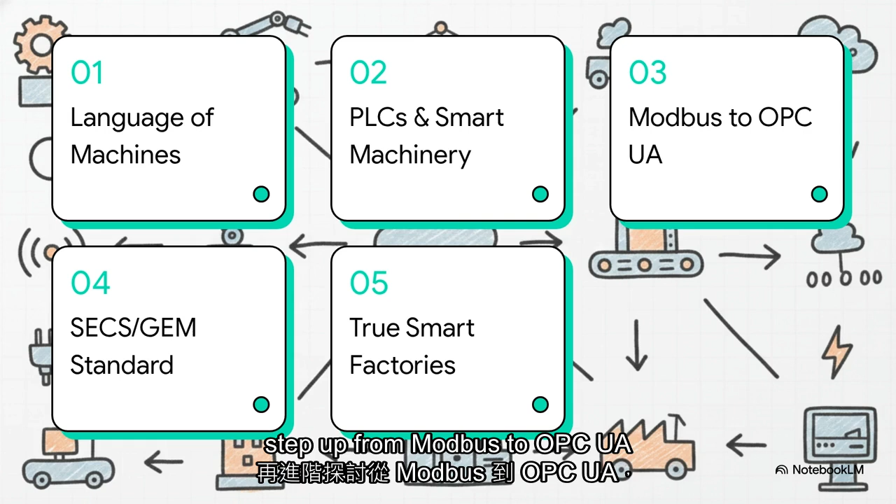Here is our roadmap for today. We'll start with the language of machines, move on to PLCs and smart machinery, step up from Modbus to OPC UA, explore the SECS/GEM standard, and finally, look at building true smart factories.

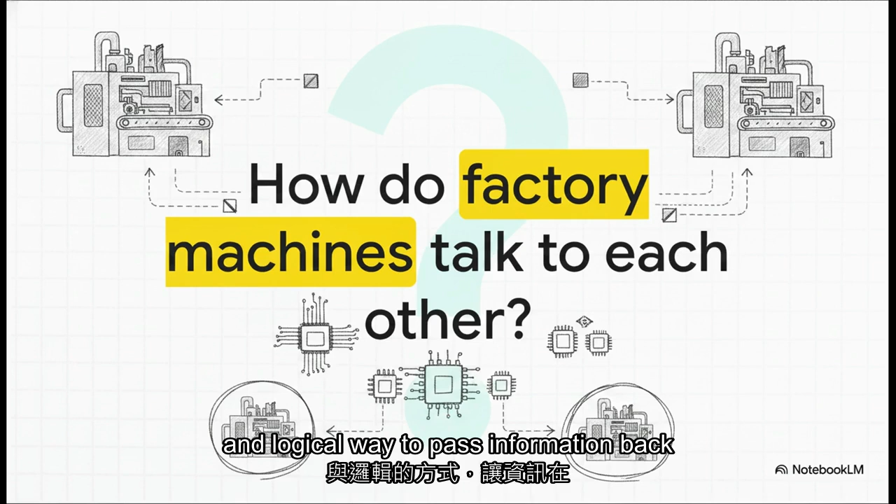All right, Section 1, the language of machines. So I want to pose this question directly to you. How do factory machines actually talk to each other? We toss around buzzwords like big data and system integration all the time, but before we can pull a single drop of data into some shiny dashboard, we need a physical and logical way to pass information back and forth between chunks of metal and silicon. Without a shared language, you just have isolated islands of machinery.

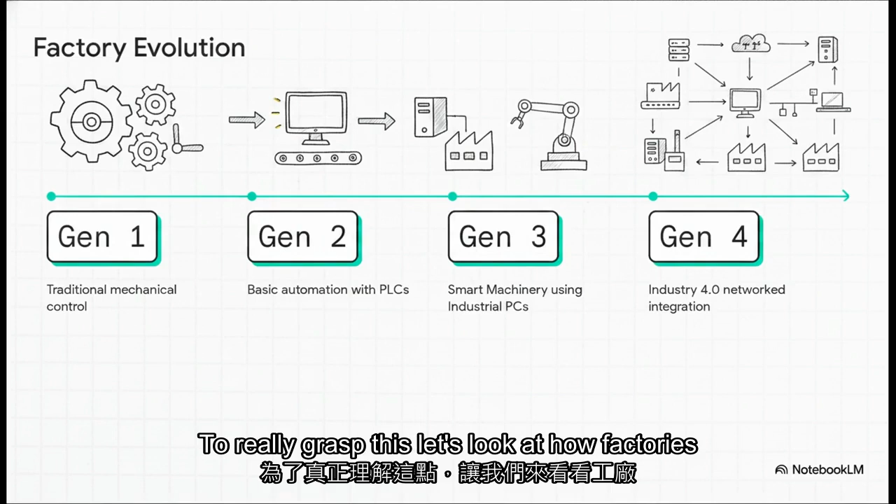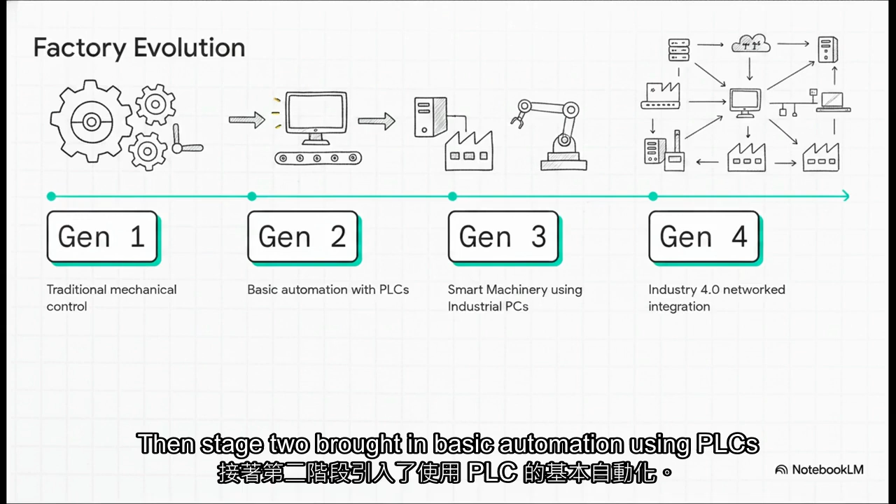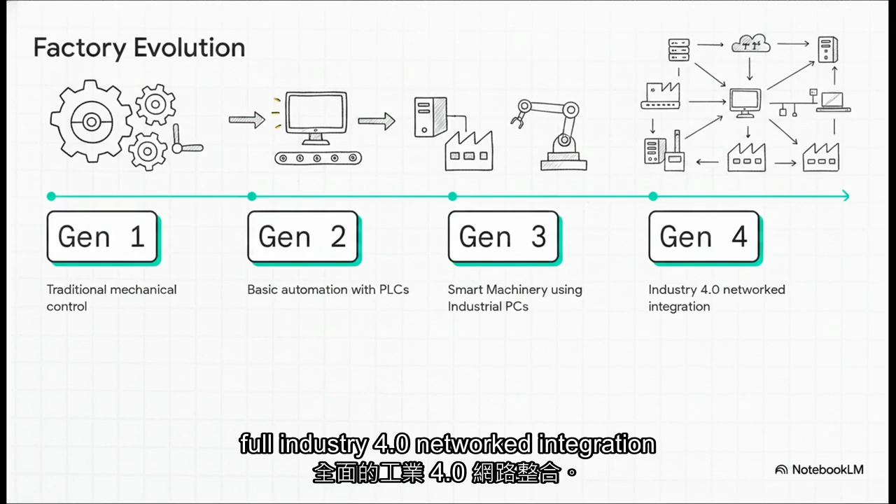To really grasp this, let's look at how factories have evolved over time. Back in stage 1, it was all about traditional, mechanical control. Very simple. Then, stage 2 brought in basic automation using PLCs. Stage 3 was a huge jump, introducing industrial PCs to create actual smart machinery. And finally, we arrive at stage 4, full Industry 4.0 networked integration. This is where data just flows seamlessly across the entire factory ecosystem. It's an incredible progression from simple physical circuits to highly intelligent networks.

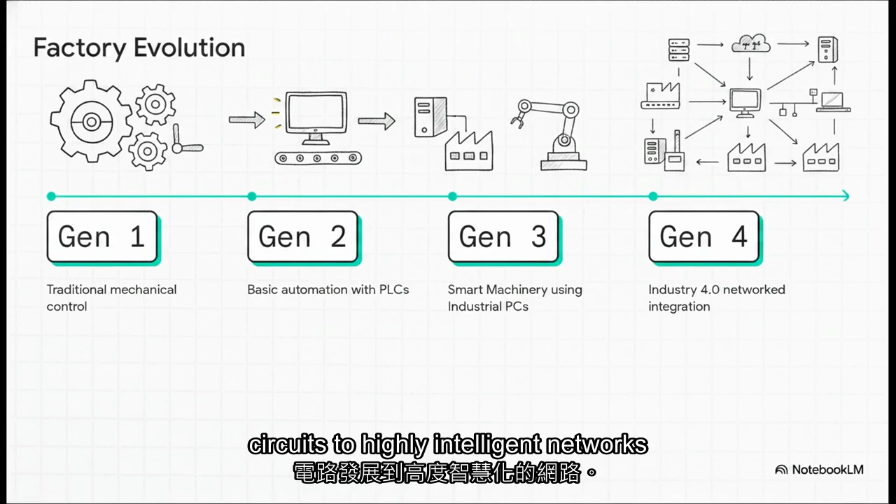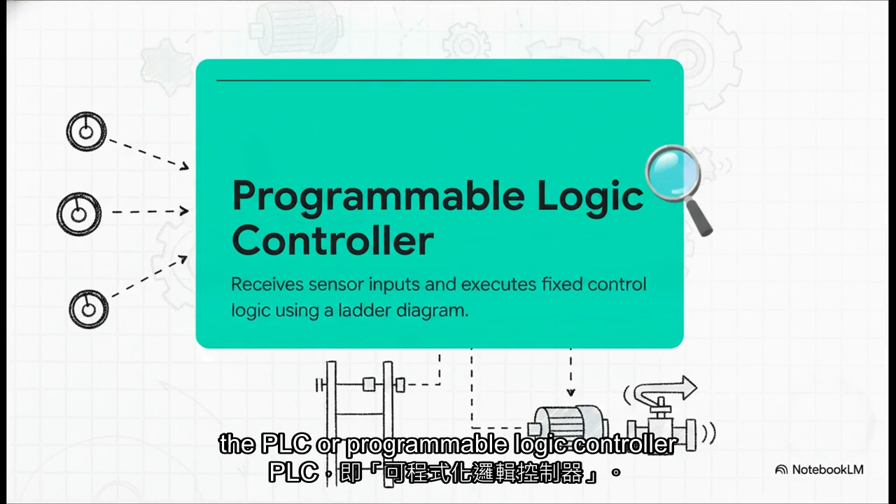Moving into Section 2, PLCs and smart machinery. Let's define the absolute workhorse here, the PLC, or Programmable Logic Controller. Think of the PLC as a really obedient worker. It just sits there, takes in signals from sensors, and executes fixed control logic, usually written out visually like a ladder diagram. It reliably turns motors on, opens valves. It's incredibly stable, but its functionality is completely fixed. It only does exactly the pre-written routines you give it, no more, no less.

But what happens when your production needs to be customized? Well, that's where IPCs, or industrial PCs, step in. Adding an IPC is literally like giving that obedient worker a super-powered brain. All of a sudden, your regular equipment becomes true smart machinery. With an IPC, the machine can process data right there on the edge, what we call edge computing. It handles remote monitoring, and it can even swap out complex production recipes on the fly. This is absolutely critical for modern manufacturing, which demands high-mix, low-volume customized runs.

Section 3, from Modbus to OPC UA. Now what's really interesting here is the massive difference between the old standard and the new one. Think of the old way, Modbus, like an old, dusty warehouse. You want data? It points you to an arbitrary numeric address like 4002, and there you find the number 930. But what on earth is 930? Is it temperature, pressure, pounds? You have absolutely no idea unless you dig up a separate external manual.

Now contrast that with OPC UA. OPC UA is like a highly organized smart library. You don't need random addresses. You just search for an object name, like reaction tank 3 upper pressure, and boom, the system hands you the value, the exact unit of measurement, and all the context you need.